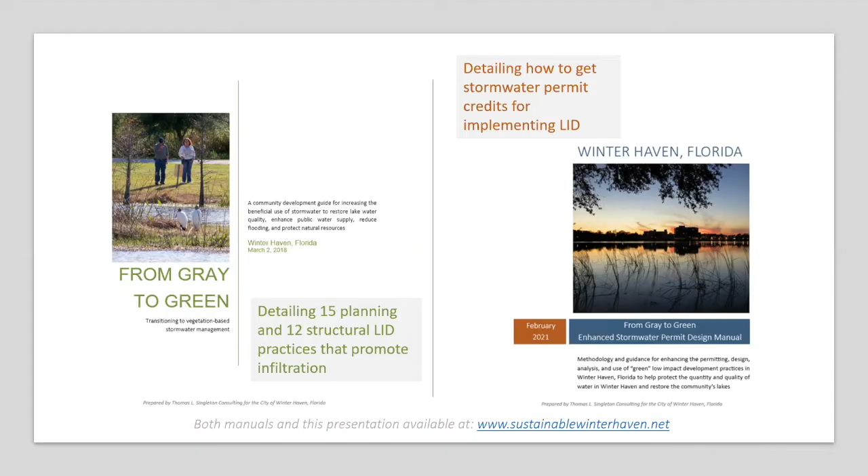I do want to acknowledge that both projects were funded by DEP through an education grant with the U.S. Environmental Protection Agency. They funded over 60% of the project, so we're very appreciative. This is part of Winter Haven's commitment to protecting the community's lakes and water resources. The community's already invested more than $6 million, mostly through grants, in the last 10 years, in 3 nature parks to treat and store urban runoff, and in more than 45 rain gardens and infiltration projects throughout downtown. We're going to be looking at some of those efforts today as well.

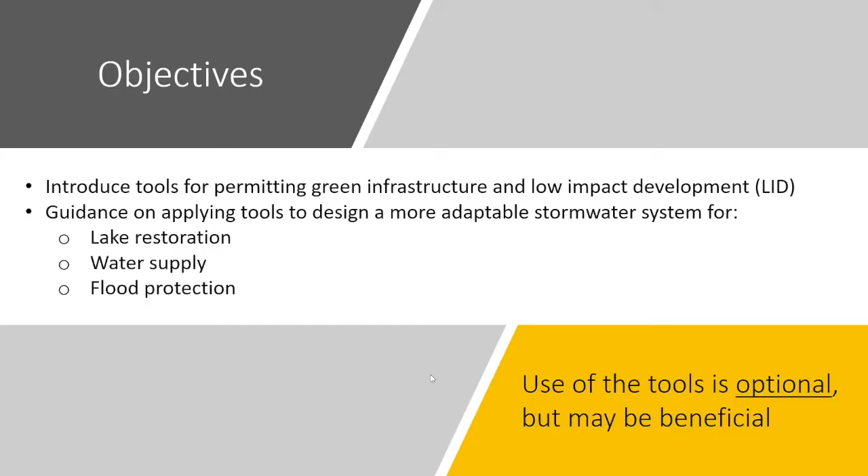Some of those benefits include maximizing and receiving credit for infiltration of stormwater, and they may reduce the size of your BMPs, thereby reducing your infrastructure and development costs, meaning less pipes, less ponds, and perhaps less developable land, or perhaps increasing the amount of land you have available to develop.

But especially important to the community in the city of Winter Haven and your quality of life is to address existing water resource impacts. As you know, 20 of your 56 lakes in the community have impaired water quality and are required to be restored under state and federal regulations. Your water supply is near capacity, and you're increasing your dependence on the Peace Creek Drainage Canal for flood protection, but you need to recognize it was never developed to provide urban flood protection and provides very limited flood protection, in fact, even for agriculture.

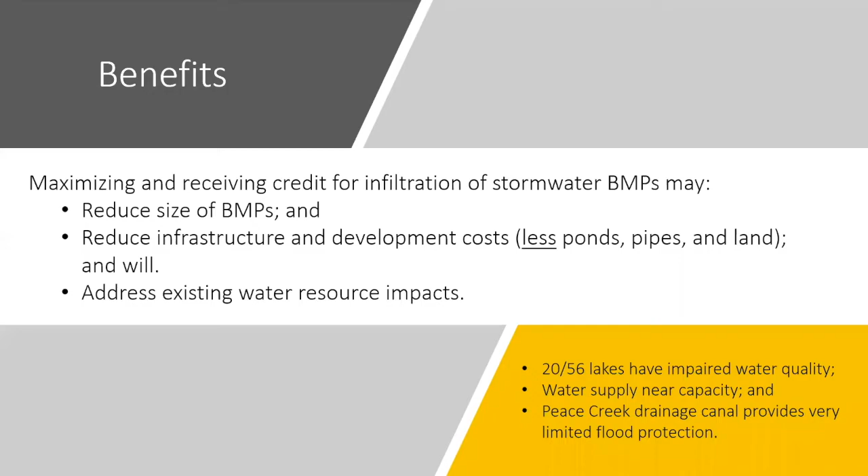So there are good reasons for why we're doing this. Most of all, I want you to recognize that the development community stands to benefit from these practices. I just want to give you a couple of examples of the opportunity to reduce your development costs.

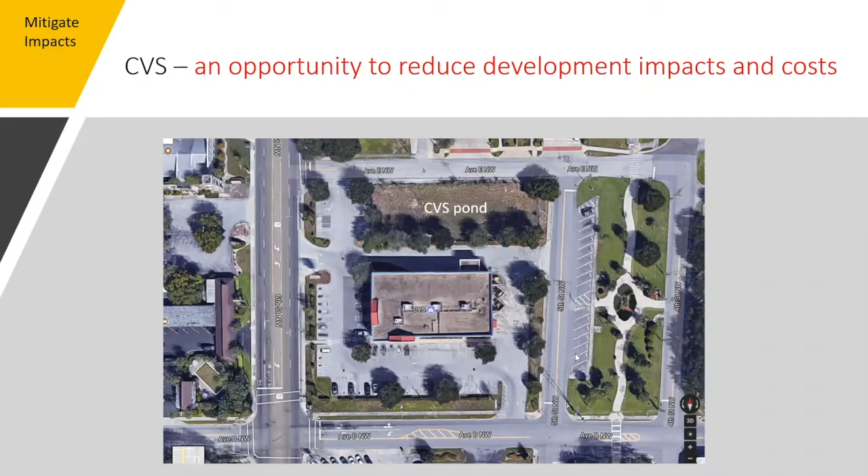With the CVS just adjacent to the downtown, as you can see, there's a large pond. You might refer to this as a traditional development, but what we're going to be talking about today is the opportunity to distribute your stormwater practices throughout your site through a distributed system. The estimate we did on this particular project is that there's the potential to save more than $40,000 in infrastructure costs, because you could completely eliminate the internal collection system using a series of drainage swales and rain gardens. And you could also significantly increase your site utilization.

In other words, if you need to build a larger building, perhaps you could. Or another alternative is perhaps you don't even have to buy as large a site. So if you're buying less land, you could significantly reduce your development costs by reducing your land purchase costs.

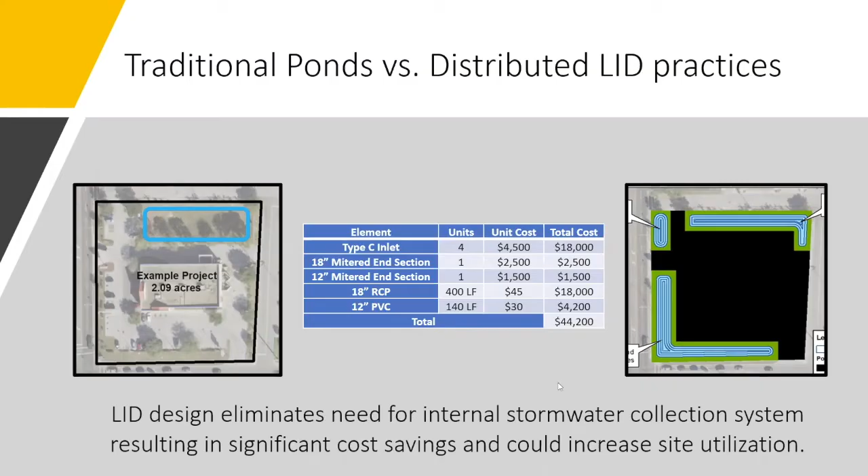I also want to just point to the FDOT Drainage Pond, which frankly is an opportunity to do better. It's an eyesore, and it's a reminder that we're not doing stormwater management just to meet regulations. In fact, we can make better design choices. And that's what I'm going to be spending most of my time about today, talking about some of those design choices.

In just a few minutes, we're going to talk about the Grove Roots Brewing Company as an excellent example of how to get it right. I think it's really nice how it stands in such stark contrast with an FDOT pond, which quite frankly is very ugly. You've never seen any water in it, and you'll never see any water in it. It's grossly over-designed, and it creates a profound quality of life impact within your community that could and should be enhanced.

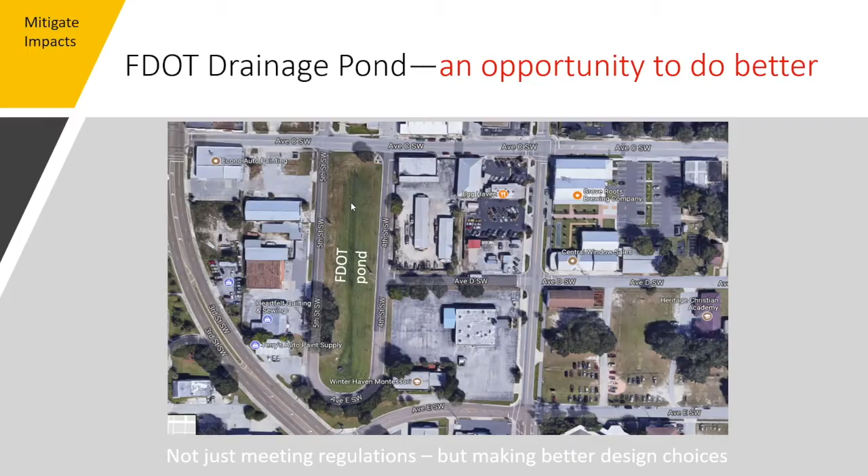I like to say, if it's ugly, we can do better. Maybe a better way of saying it: if it's ugly, it's wrong. And if you'll just remember that one adage today, I think it'll be a careful reminder to try to do better in the design choices that you're making.

We're going to talk briefly about the permitting methods, the design principles, and then how to bring all of these things together. So three principal parts.

With regard to the permitting methods, I do want to point out that we've got a technical training session for engineers, designers, and planners that's going to be held the first week in March, March 3rd from 1:30 to 3:30.

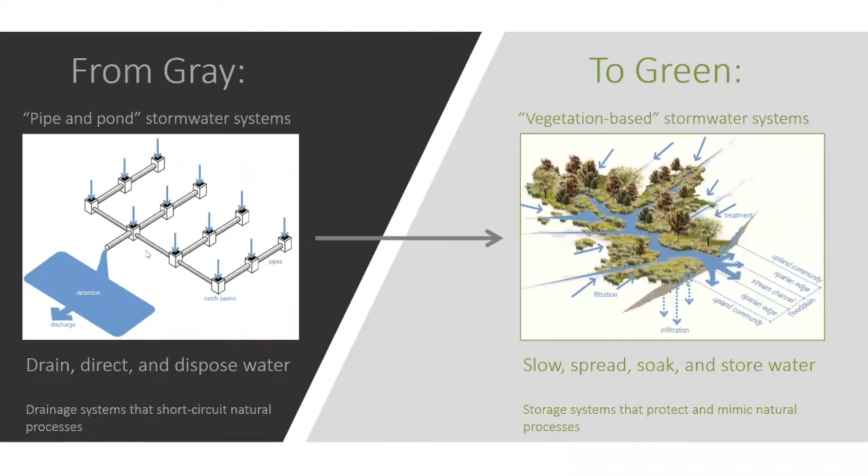From a slightly more technical perspective—and this is about as technical as I'll get today, since we've got a mixed audience—what we're talking about here is transitioning from controlling peak flows, which are important, to also reducing runoff volumes.

What we've come to understand is when we control peak flows only, the total volume of water leaving the site can increase dramatically, dewatering areas, but more importantly, potentially flooding areas downstream. This can impact both water quantity and quality, and significantly reduce the water stores available to the lakes and your drinking water supply.

By reducing runoff volumes, we're maximizing the capture of rainwater to reduce the volume discharged downstream, replicating the natural rainfall response system. This turns out to be really important to protecting water quantity and water quality.

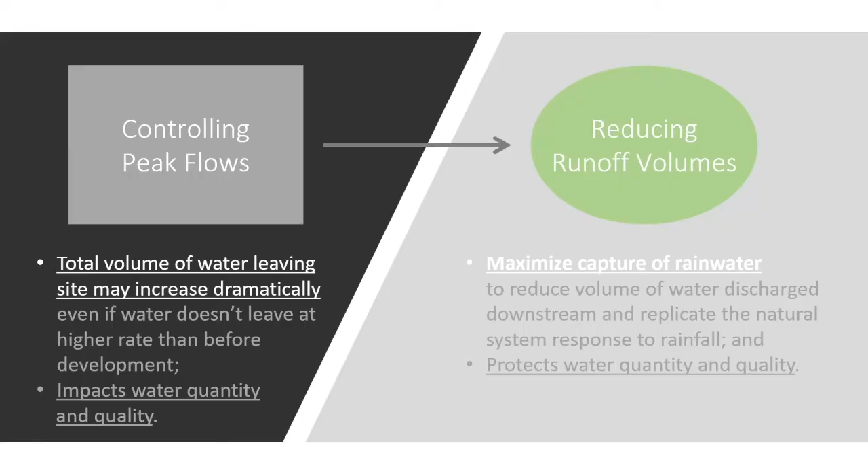You may have seen this before from DE. When we take land and develop it, and develop the stormwater systems under our practices today, we can increase the amount of runoff by 5 times or more, and reduce the amount of infiltration into our groundwater, recharging our aquifer, by more than 60%.

In effect, what we're doing is reducing the stormwater runoff. By reducing stormwater runoff through the methods we're presenting today, we can help maintain the water balance. This is not anti-development—it's about getting water into the ground as quickly as possible, making sure it can be put to beneficial use for the community and not cause additional problems.

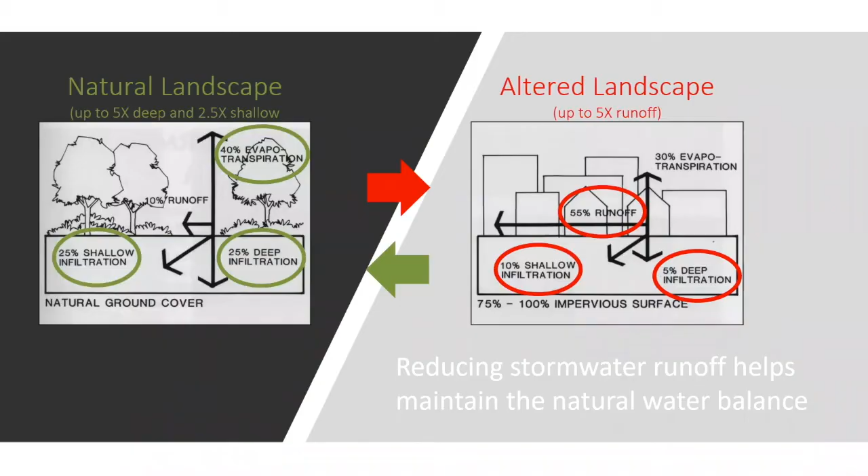I want to point to a couple of legacy issues that really drive this point home. Much of your downtown is 100% impervious, and this is just one example. Because of the imperviousness, the water often goes directly into a pipe and gets discharged directly to the lake, impacting water quality. It can also quickly become overwhelmed, and you've probably seen flooding right down through Central Avenue and in some adjacent areas.

But there's a tremendous opportunity to retrofit these areas to get the water into the ground. It doesn't necessarily mean creating a lot of green open space, although that can be beneficial. You can see over here the city's actually constructed some rain gardens along this area to take off some of the load from the city parking lot.

Let me give you a sense of how much water is potentially being lost to your aquifer, which could be more naturally recharged to your area lakes. The rainwater loss from 1 acre of land in Winter Haven is estimated to be close to 2/3 of a million gallons of water per year.

That's a heck of a lot of water—enough to meet the annual needs of 14 people or 6 households. We're talking about a significant amount of water that can be protected within your community, and our presentation today is about how to do that.

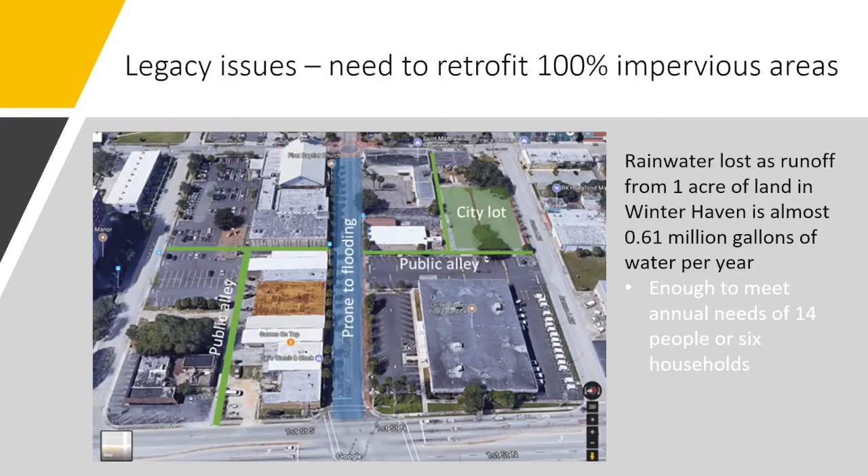The conditions downtown are one of the reasons why the city's already invested in 4 nature parks to treat the urban runoff.

Remember my comment before, if it's ugly, it's wrong? Well, I'll tell you, if it's pretty, it's right. This is the Lake Howard Nature Park, an 11-acre hydrologic restoration project that captures stormwater runoff from the downtown area of a 578-acre urban watershed.

This site is so beautiful that it's probably one of the most heavily visited sites within the community. So it truly is a community asset, serving to benefit water quality in the lake, help recharge the aquifer, and most importantly, provide a place to get away from the constant grind of our everyday lives.

The photo on the right was taken by Mike Britt, and many of you may recognize that's Kim Hansell, your former director of utility services, who was a big proponent of the gray to green approach. So thank you, Kim.

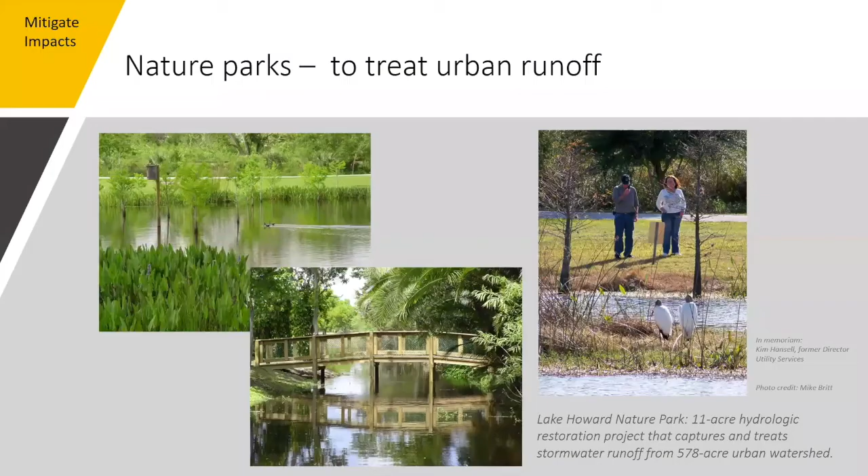The water losses, though, at a regional scale are much greater and are truly profound. What we're looking at here are potentiometric surface maps on the left-hand side, which show the amount of water that's actually contained within your aquifer that supplies your drinking water supply, and that also helps keep your lakes full of water. On the left, you can see the pre-development condition.

On the right, you can see the potentiometric surface levels in 2008. This is showing that there's been in excess of a 10-foot reduction in your aquifer levels below your community. This is reflected partly in lower lake levels within your community, and it also is reflected in a reduction in the amount of water potentially available to supply your water supply wells. This is a really big deal.

Back in 2014, as part of the Central Florida Water Initiative, Kevin and I made estimates of what those lake storage losses might be. If you consider that these lakes are recharged every day when it rains, we're estimating that you're losing about 146 million gallons per day, which is 10 times greater than Winter Haven's water supply needs in 2050. We're talking about a whole lot of water.

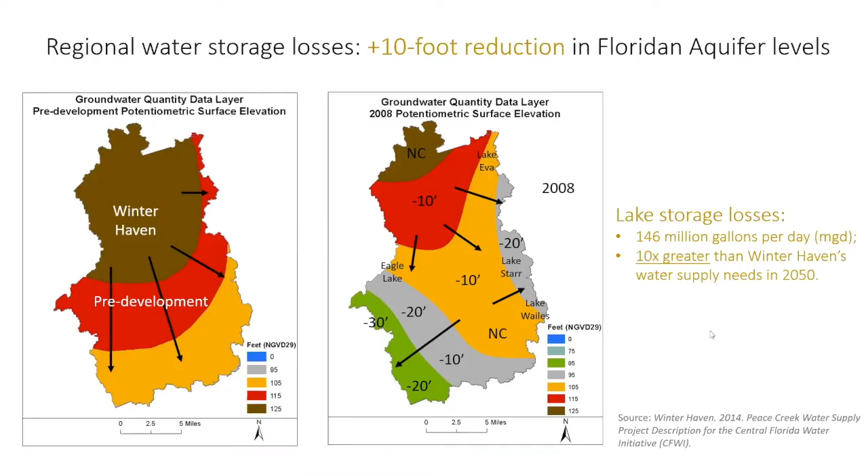So I hope at this point I've convinced you that rainwater is a resource to protect. We don't want to be getting rid of it. We want to capture it. We want to store the rainwater and the runoff. We want to facilitate infiltration and groundwater recharge. If we do that, we can filter and assimilate the pollutants in the rainwater and runoff. The water is essential to sustaining the natural hydrologic processes and ecological systems.

They're absolutely essential to your lake and watershed health, and ultimately it's going to be really important to providing flood protection in many of the downstream areas of your community. Bottom line, I don't think I exaggerate when I say that protecting rainwater represents the greatest opportunity for meeting the city's water resource needs.

Remember, rainwater is your primary source of fresh water, recharging your lakes, your aquifers, and supplying your drinking water. It's not the groundwater, that's a secondary source. It's your rainwater, which is recharging your aquifer, providing your drinking water, and protecting your lakes.

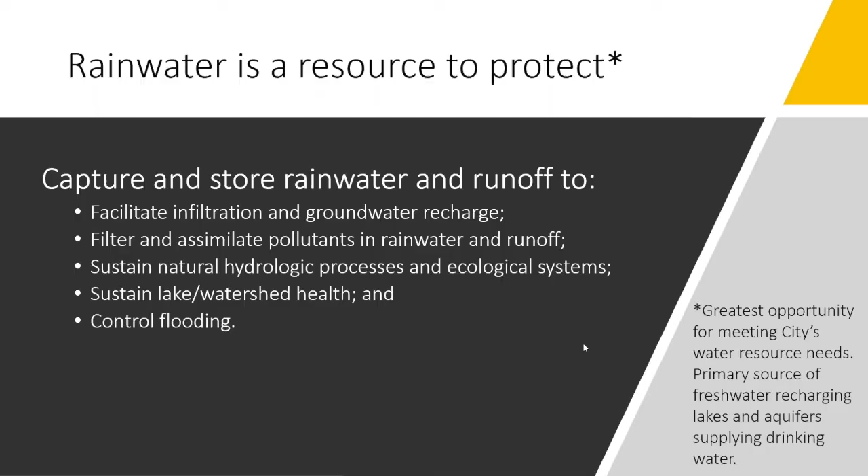What I'm going to do is go through some of these design principles to give you a sense of what we're talking about, mostly using lots of pictures and examples from your very own community. As I mentioned at the outset, many of your local engineers, designers, and developers are well aware of the benefits they derive from implementing these practices. Our only message today is that even in those instances, oftentimes we can do a little bit better. So even if you're doing these things, I hope you'll take the opportunity to help refine your efforts and use our manual to do that.

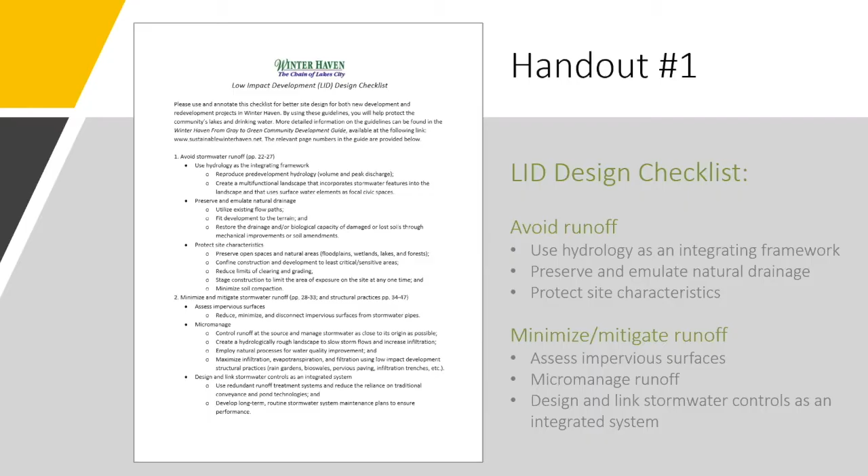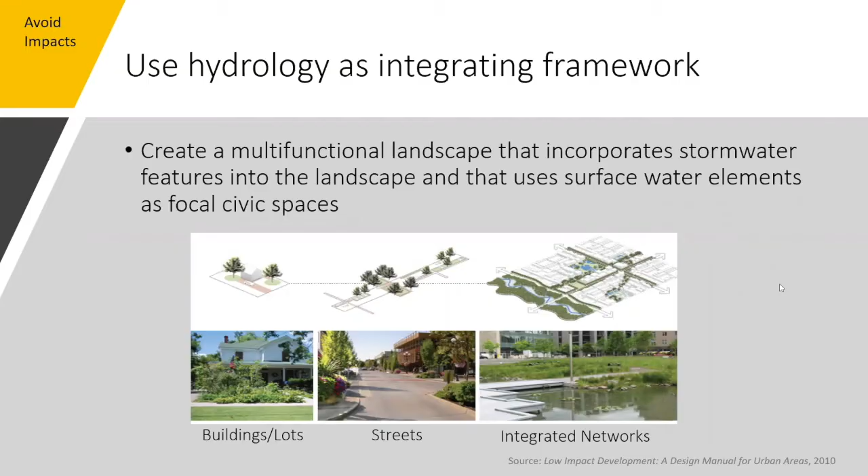The first concept for avoiding impacts is to use hydrology as an integrating framework. We need to understand that it's important to implement the practices we're talking about not only at the site level, but at the street level, and then eventually throughout your entire community. We're going to look at some of those examples from your community.

You don't have to look far to realize that your central park provides a wonderful backbone for your community, not only in terms of your civic life, but also providing a high recharge area right in the middle of your downtown community. We're going to be looking at a number of older projects developed back in the 60s that build on this same principle of providing open space for infiltration. So look forward to that.

It's interesting that in many instances, some of those lower areas are naturally low and hold water. We want to make certain that we are providing adequate storage for the waters that are already being stored within these areas.

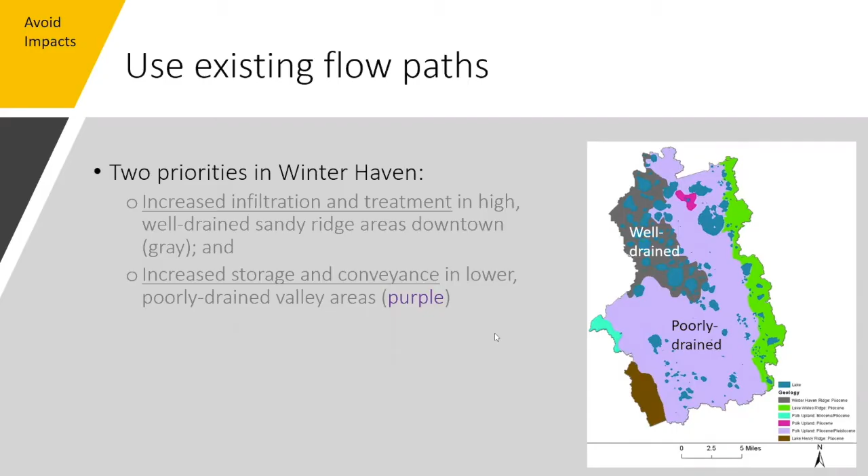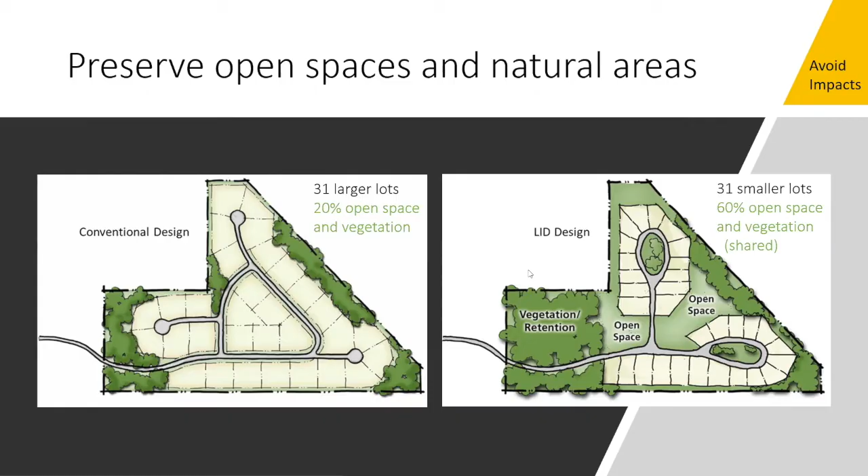I want to come back to this concept of not just meeting regulations, but making better design choices. Protecting open spaces and natural areas is extremely important. This is an example that actually comes from the Water Management District Permit Manual.

If you have a natural landscape with a riparian area, you don't want to build over it if you can avoid it. LID designs suggest that we can, in fact, avoid building over these riparian areas and still retain our building and parking as desired. Unfortunately, our regulations today can allow you to build over riparian areas with a profound impact to your community. Although you may be providing compensating areas, shown in green in the center graphic, they can nowhere compensate for the benefits that are lost by building over your riparian areas. So we don't want to just meet regulations. We want to make better design choices. Doing this, and not doing this, should be a no-brainer.

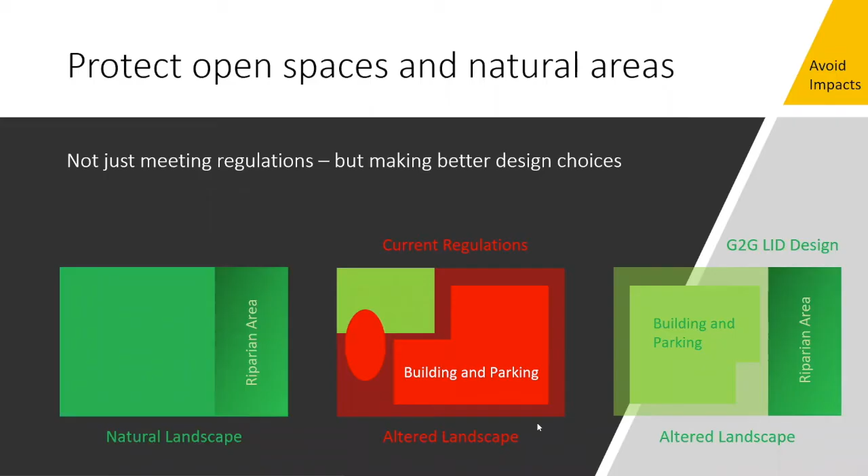I think it's interesting that you did this with your Winter Haven Chain of Lakes Sports Complex, where you moved all of your buildings and structures up out of the floodplain and areas recognized to flood. Although some of your ballparks are within areas that, as this graphic shows, could flood under extremely high water conditions, you're significantly reducing that risk of loss of property. In this instance, you're not building into the floodplain at all, or into the natural areas that are currently undisturbed, which is really important.

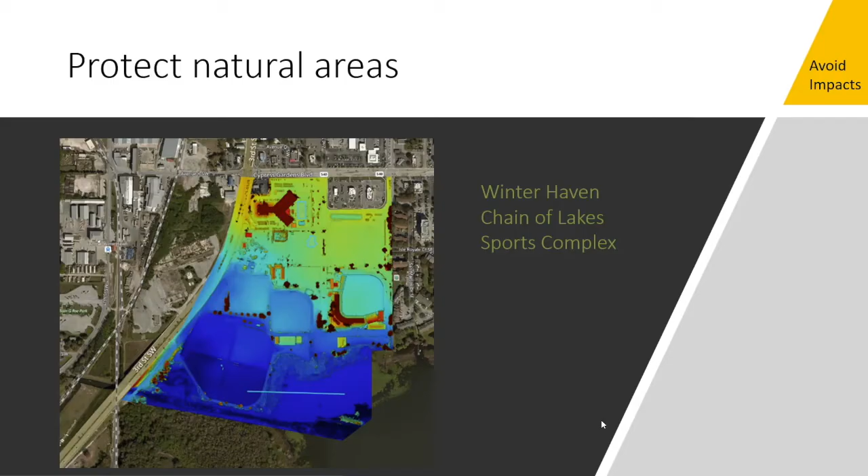We want to integrate hard and soft engineering. Many of the designs we're seeing today are really all about dry detention, wet retention, and flow control devices, so-called hard engineering. But it's these other choices shown in green, the soft engineering, that allow us to mimic natural processes and optimize them to infiltrate, evapotranspire, and reuse stormwater. But even still, you have to recognize that as good as those soft engineering practices can be, they do not fully restore the functions of your green infrastructure. They only mitigate.

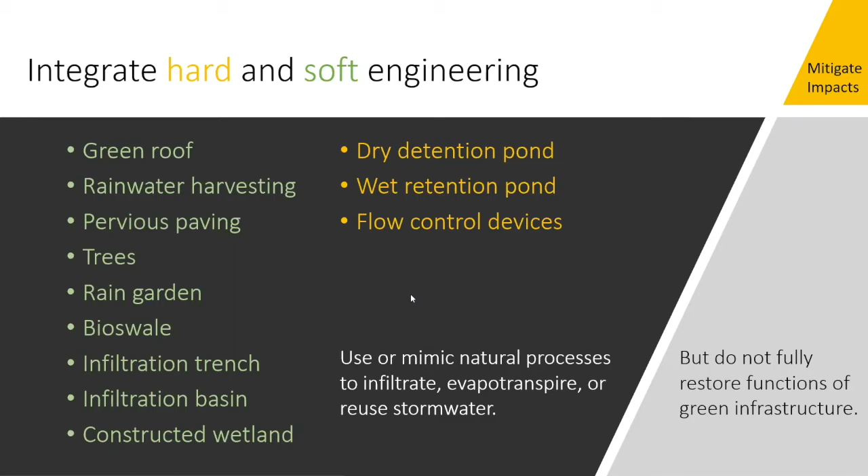In integrating hard and soft engineering, these are, in effect, the processes by which we can slow, spread, and soak. We want to combine multiple systems together for the purposes of flow control, detention, retention, filtration, infiltration, and treatment. We're going to look at some projects here in just a minute that integrate virtually all of these different aspects to produce really desirable and high-performing sites from a water resource perspective, and also from a quality of life perspective.

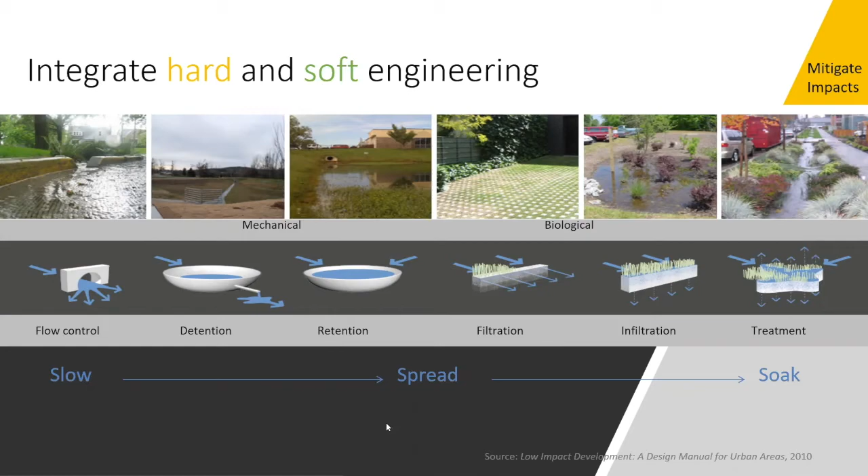As you're selecting your structural practices, do so by location, starting where the rain falls on your roof, then into your other impervious areas, and working out from there to where you have runoff, even off of your pervious areas and open spaces.

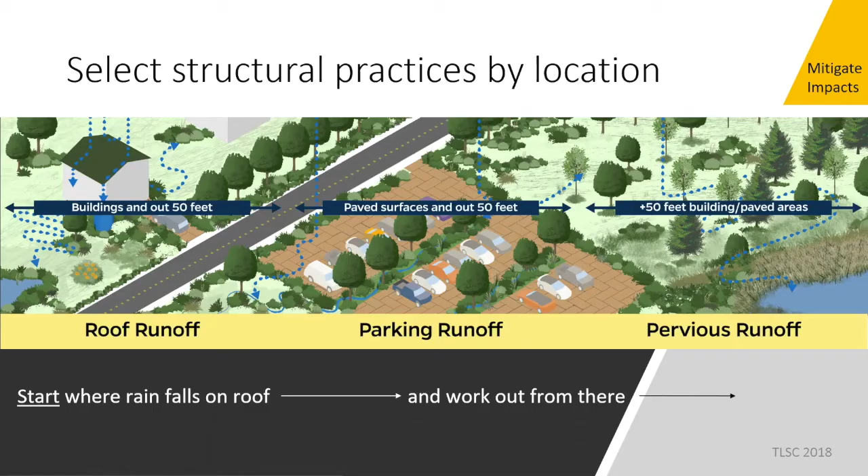We want to link stormwater controls as a system. We want to use redundant runoff treatment systems and reduce the reliance on traditional conveyance and pond technologies. In this example, water falls on the roof, goes into a cistern, overflows from the cistern into a neighboring garden area, and eventually flows down through the remainder of the property. This is what we mean by creating a tortuous course, or a pathway for water, so that it gets into the ground as quickly as possible. We're not putting it into a pipe. In fact, this particular design has no pipes, no conveyance system, and no ponds.

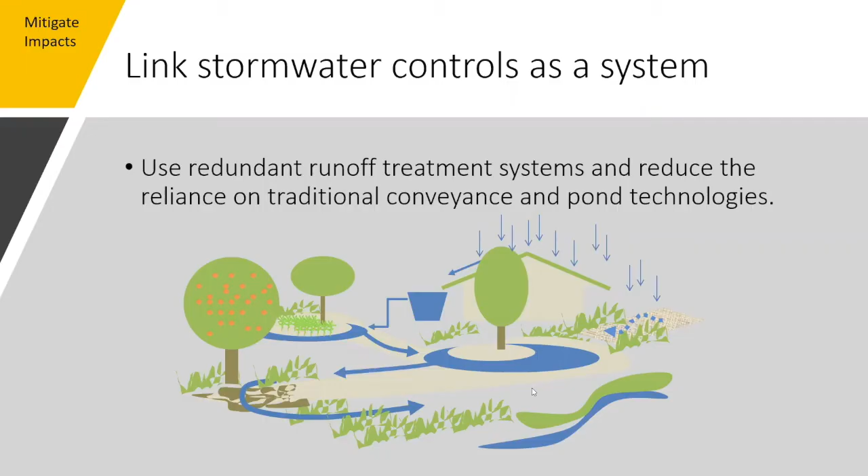One of the best examples I can point to of getting this right is the Winter Haven Fire Station #1, right there in the downtown, which was completed a number of years ago. It's a beautiful site. It was able to retain some significant legacy oak trees. There's significant provisions of additional plantings of vegetation throughout the site, but the site is one serious interconnected series of swales which collect the runoff from your buildings and parking areas. It's really a wonderful design.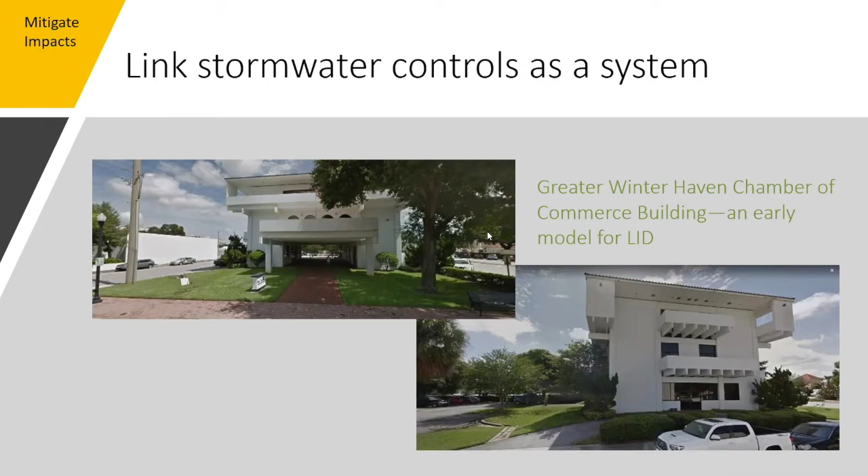You capture all the water that runs off the roof, and then you quickly place it into shallow swales adjacent to the building and throughout the parking areas. This is truly a wonderful design. Here again, this is the chamber building. These are the parking areas. See the broad swales. You know, every time I'm in Winter Haven, I typically come over here, I get my

sandwich at the library, and I sit in the park. And I'm not alone. I'm usually accompanied by 20 or more people, particularly on a beautiful day, maybe not on a cold day like today. But this is the backbone of your community. This is a central part of protecting your water resources.

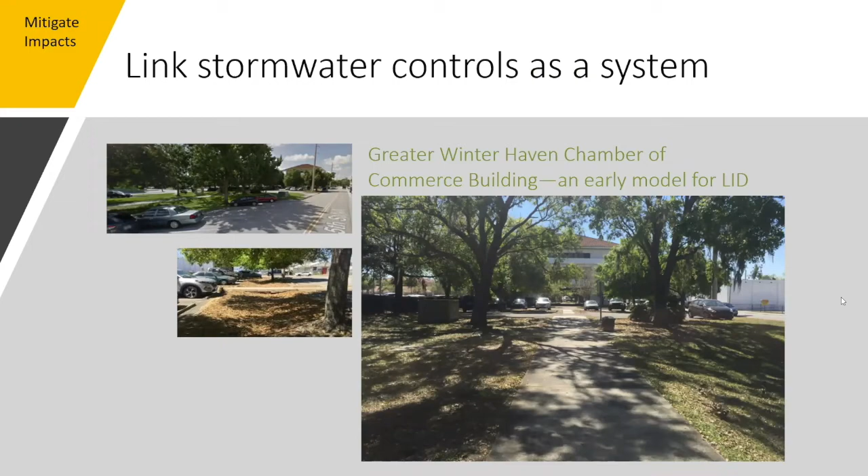I love this project too. It goes vertical, 4 stories in fact, and the residential structures are located on top of the parking area. So you're minimizing your amount of impervious surfaces. You do have a broad, shallow swale. We have significant vegetation plantings. I just simply love this project, and we need to be doing more of it.

I think it's really nice too, how it fits into the neighboring linear park here that again is almost adjacent to your downtown, actually City Hall. I spend a lot of time in this area. It's located also at your chain of lakes walkway here.

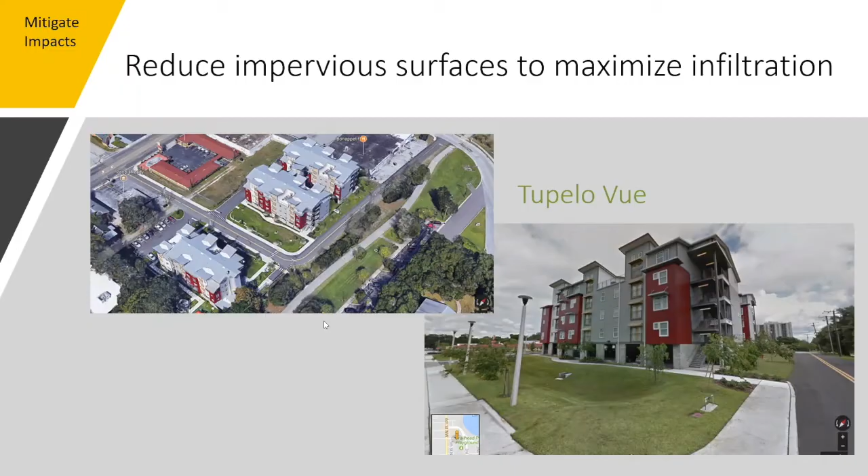I mentioned this earlier, the Grove Roots Brewing Company was an example of a 100% impervious area. They did an excellent job. I think this was done by the 610 Development Company. They eliminated and disconnected a lot of their impervious surface. And it's remarkable, they're containing virtually 100% of the runoff from this site on site in these vegetation areas here and throughout your parking lot.

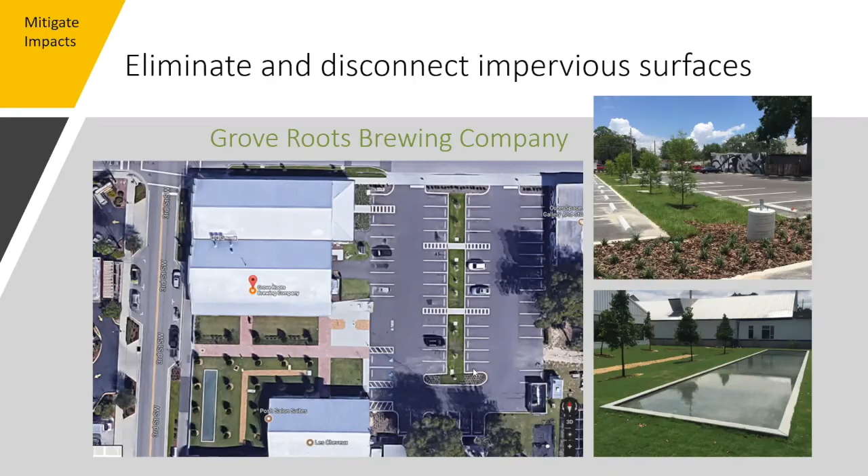I like spending time here too, as I suspect many of you do as well. I'm a big proponent of downtown redevelopments, and one of the things I really like about this design is the construction of this half wall, which helps maintain the urban line that you would expect to find in a downtown area. So it's highly functional. It's a beautiful site. We need to see more development like this, redevelopment like this in the downtown.

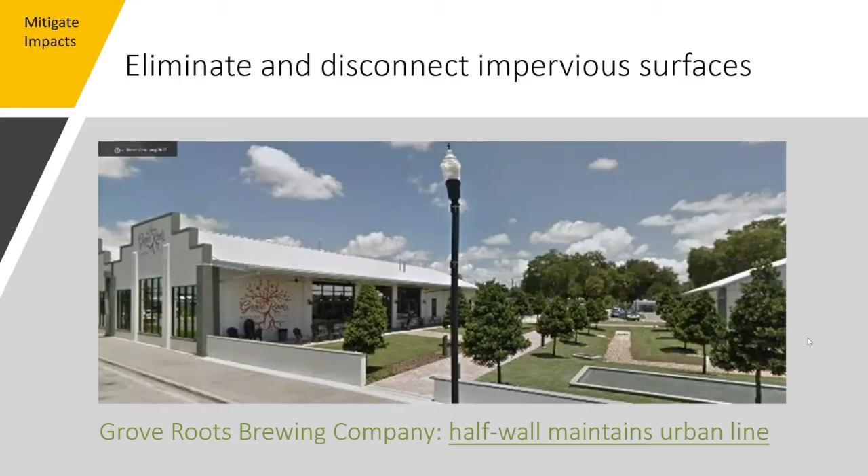Oh, look at this wonderful area here too, showing your infiltration trench located right within the property. City Hall itself is a wonderful example, built in the early 60s. All of the water off the roof is collected in downspouts and captured in this area right here, where it goes directly into the ground, infiltrating immediately.

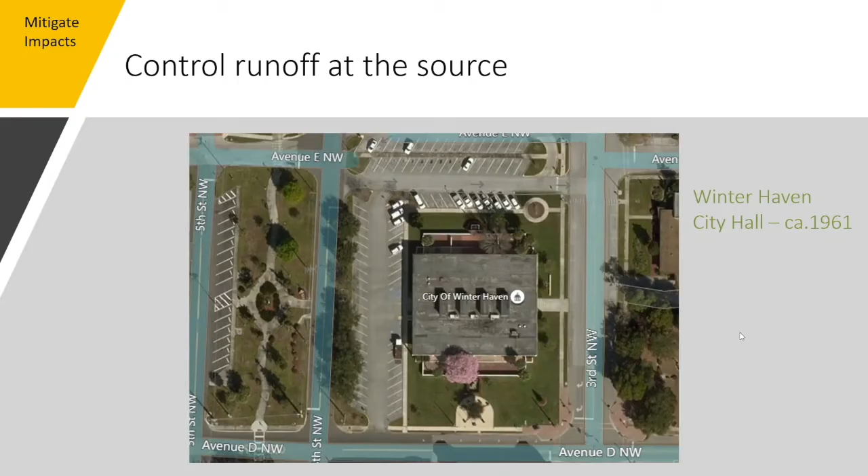Here's a view from inside that area, showing that there are, in fact, features here that if water got up high enough, it could actually flow directly through a vertical well into the groundwater. But to my knowledge, those wells have never had to be utilized because you're in such a high recharge area. But this is a wonderful design. We just need to get a few more plants in here and it would be even more successful.

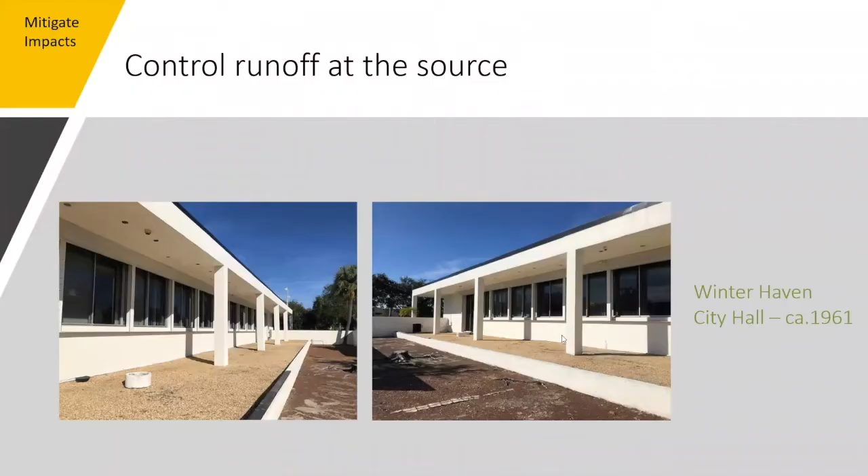This is the Winter Haven Utility Services building. This rain garden was probably the first set of rain gardens constructed in the community by Kim Hansel, the former director of utility services. This was a virtual asphalt desert. It was not a nice place to be. And now it's a really nice place to be. You oftentimes see staff sitting outside, relaxing, having their lunches. It has significantly enhanced the quality of life for the folks working at this building.

It's controlling the runoff directly that comes off these roofs and captures all of that water. None of it actually flows into the adjacent parking areas.

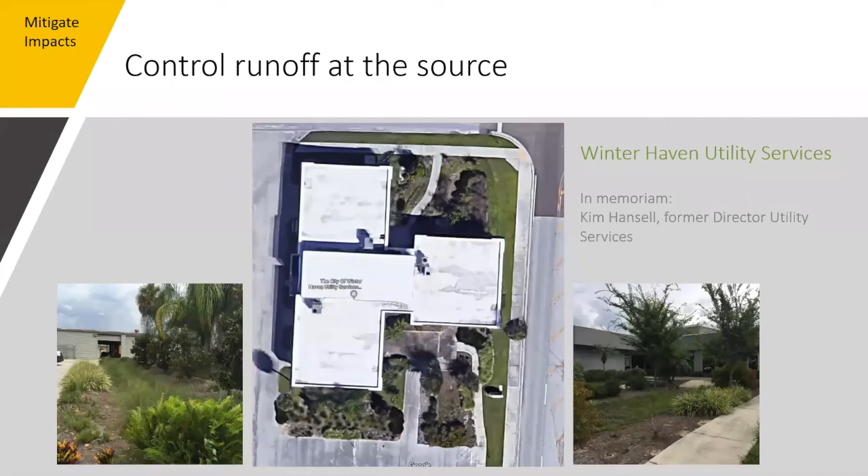The community has spent literally $1 million or more in rainwater projects, infiltration projects along your rights of way. This here is adjacent to your library. It's significantly added just an overall quality to what's a really great project anyway in the library. And of course, this is one of the city services buildings with a beautiful rain garden.

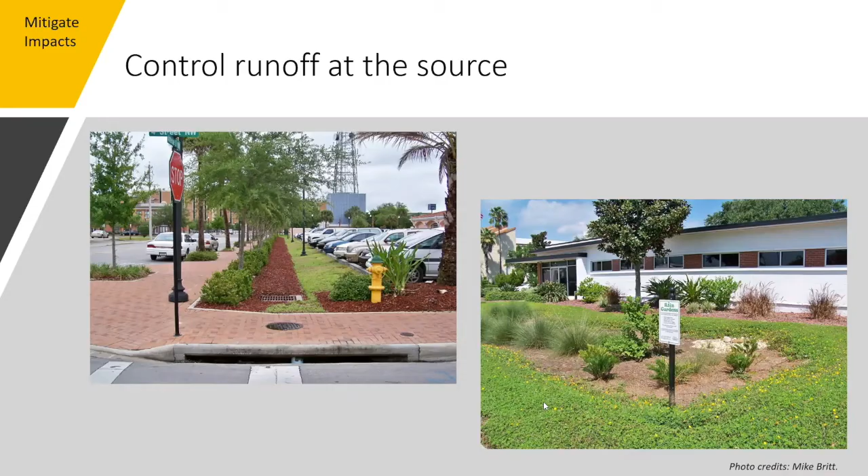These things are pretty, they're highly functional. We need to be doing more of them. They need to be throughout your community and throughout all new development.

One of the things that is going to be really important to pay attention to is developing maintenance plans to ensure that the BMPs are performing as designed. This is not only important for the dry and wet detention ponds that are out there, which are oftentimes neglected and become highly non-functional, filled with sediment and simply don't work anymore. But it's especially important for the bioretention facilities we've been discussing, as well as infiltration facilities and permeable pavements. All stormwater systems require maintenance.

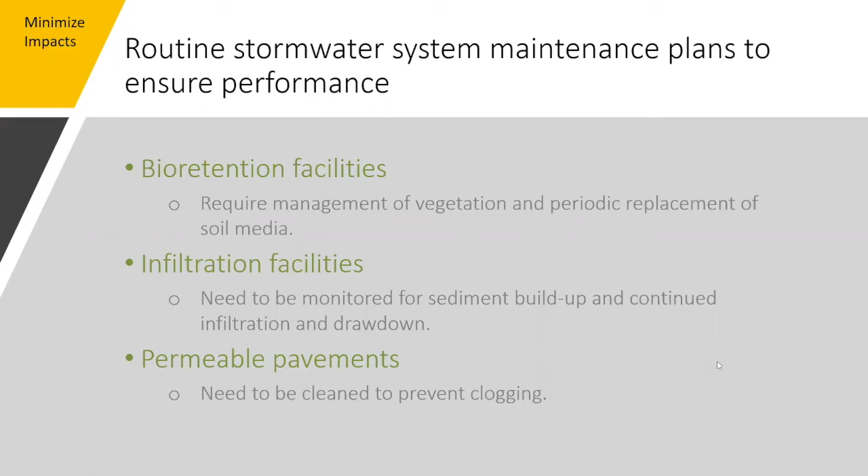Just because a pipe is out of sight and out of mind, we think we don't have to do anything with it, but in fact we do. By constructing LID bioretention facilities, we're actually putting that infrastructure on the surface where it can be more easily maintained. And again, it provides quality to the site.

Putting it all together can be a challenge. It requires a certain amount of planning, science, and engineering, but to do all of those things requires a certain art. It's not ironic that when we say water, we all think about it in different ways, and this is part of the challenge. We have to think of water in terms of all of its beneficial aspects to our community, and we have to come together to enhance our designs.

So I have just a few summary slides to summarize everything I've told you. Green infrastructure and hydrologic functions are the key to selecting your structural and non-structural BMPs. But remember, your structural engineered controls at best only mitigate impacts. It's your non-structural planning controls that really restore and conserve your hydrologic functions. Through the example I shared with you, and I can share others, they're cost effective, practical, and often more efficient than structural controls, and clearly they should be implemented before structural controls.

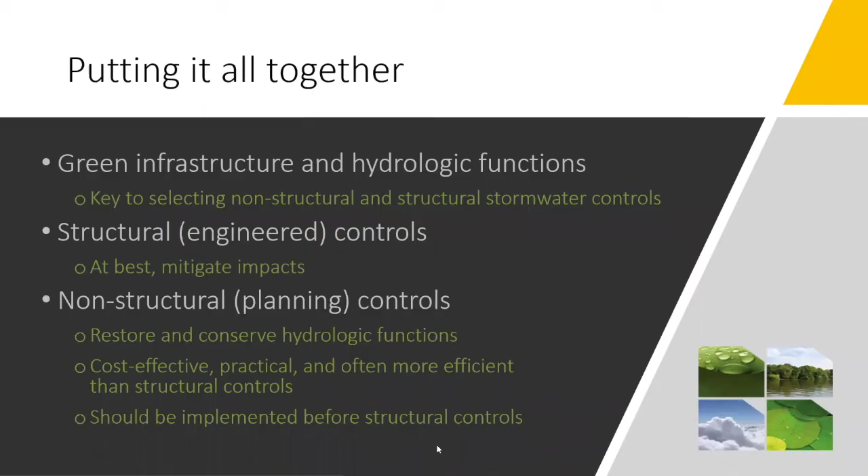In sum, we want to make room for our floodwaters. We want to filter and cleanse that runoff. We want to store water for dry days and droughts, and with climate change, we have a lot more dry days and droughts. We want to recharge the aquifer for water supply. We want to let the water flow for nature. And most importantly, we want to maintain the natural hydrological cycle of rainfall that recharges our aquifer for both our lakes and our water supply.

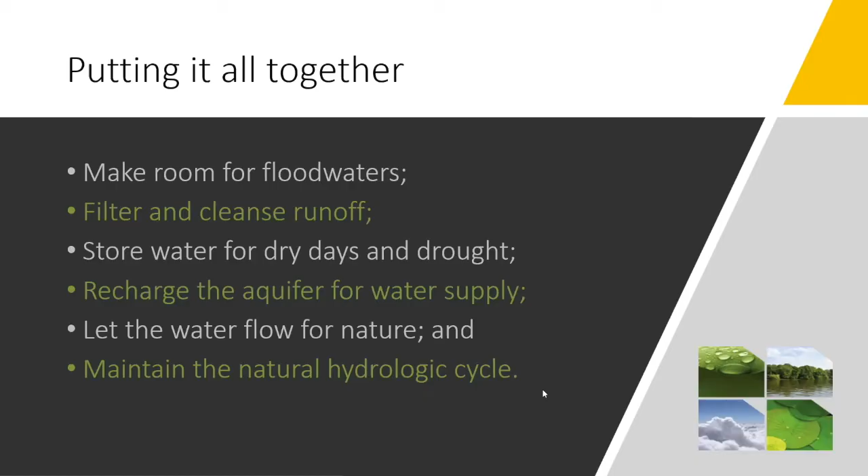A lot of times people say, but our community is already built out. I want to suggest to you that there's a huge opportunity to restore your water resources, not just in your developed areas, but throughout your entire watershed, more than twice the amount of land that you currently have developed could be developed at some point in the future. That includes floodplains and lakes that have to be protected. So there's a tremendous opportunity as development occurs in these areas to think about how to do that in a way that protects your water resources. With the construction of the Central Polk Parkway, it becomes ever more incumbent upon us to think about the designs for all of the development that is already coming to these areas.

In closing, you can be the architect of your water future. As Luna Leopold said, the health of our waters is the principal measure of how we live on the land. You have a beautiful community, and it can be made even more beautiful. As your community builds out, you can ensure that you have the infrastructure for protecting your lakes and the water supply that you'll need to support your community. You're already doing a great job. I hope that you'll find that the two manuals I've shared with you today, and most importantly, the permitting manual that was just released today, that you'll put it to good use. So with that, I'll stop and answer any questions you may have.